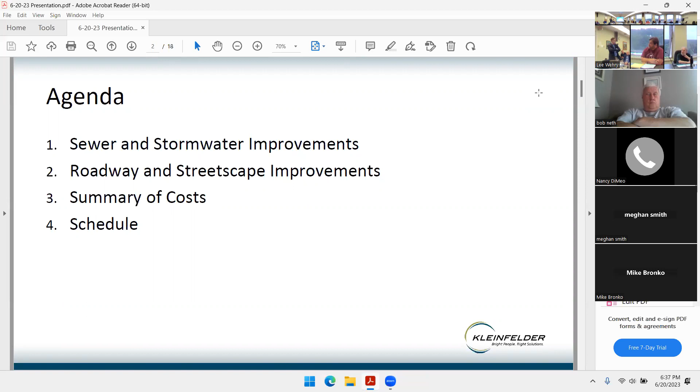So quickly, we'll talk a little bit about the stormwater improvements. Again, the mayor did a great job kind of introing why we're here. Mike's going to dig into some of the detail, the roadway and streetscape improvements. So we've got some nice renderings so you can see what you're going to get. And then as a summary, we'll walk through the costs and what the schedule is going to look like, hopefully moving forward.

So, as the mayor indicated, we collectively came into this with the understanding that there were significant issues in the downtown area, in this west side of Naugatuck, really drainage issues in particular. And the mayor and Jim and Jeremy really explained the dynamic of what was happening down here and what they saw, when they saw it, so we took that back and studied the systems, modeled the systems, performed hydraulics, and really found significant issues, right?

So there's three goals here. One is to fix that, essentially address those issues. Two was really we wanted to make sure that the surrounding infrastructure was also supporting the development plans that the borough also has. So is there enough capacity in the system? How's the drainage? Really, the third thing is how is parcel B going to integrate with the downtown area?

So really our approach to the drainage, the stormwater drainage, and ultimately the sanitary here was to address those three components, right? So what we found was Church Street, the drainage system was undersized. It had conditional issues, so like broken pipes, segmented pipes, probably been in the ground for 100 years, parts of the system, at least. Maple Street, it wasn't so much the overall capacity of the pipe, but there were some bottleneck segments there due to repairs over the years.

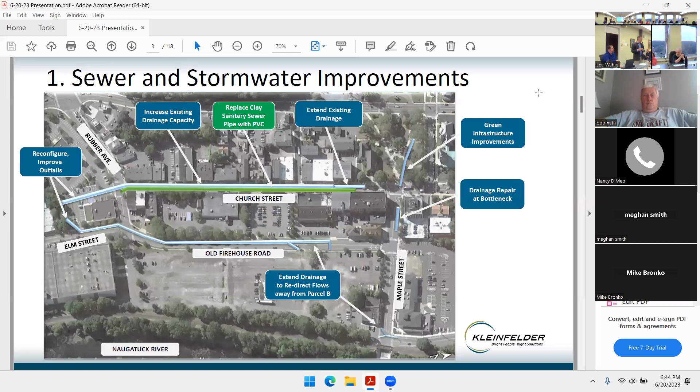All right, so Mike's going to take over for a little while and walk through what the roadway and streetscape improvements are going to look like.

No, he's moving it. Right. Just point.

plantings, street trees, pavement, outdoor furniture, the design of these outdoor spaces all work together to create, I think, a much more festive and inviting atmosphere, a more pedestrian-friendly environment. And all will go to increase activity in the downtown, which is a good thing for merchants and business people.

This is from 30,000 feet, the overall streetscape plan. I'm just going to give you a quick overview on this, then we're going to get into some more details and graphics. This is the plan. It's really an advancement and refinement of the plan that I presented to this board back in the fall. You remember, it was preliminary design. And we've made some great progress here in moving this forward.

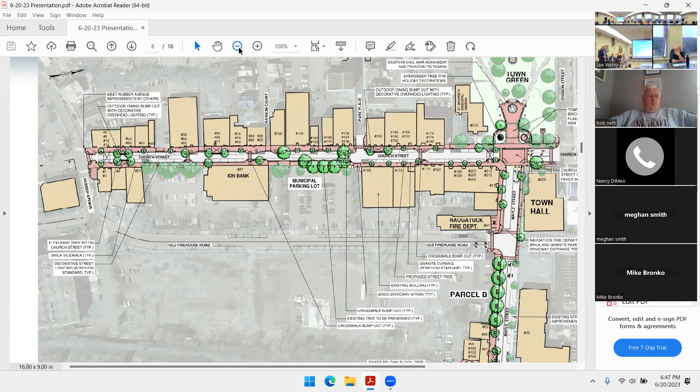The plan takes a really comprehensive, complete streets approach throughout the downtown. It looks at roadway pavement, traffic calming, improving pedestrian circulation, widening sidewalks, narrowing crosswalks. It also looks at linkages from Church Street to the surrounding projects, including what the mayor mentioned, parcel A

and B. The new rail station, it'll be located down here, and some of the connections through the alleyways and proposed walkways to the parking that supports Church Street. Streetscape improvements include brick sidewalks, more appropriate street trees, which I'll talk about in more detail later, the different types of lighting, ornamental and specialty lighting, outdoor dining and gathering areas, opportunities for sculpture and art.

A major part of it is really the transformation of this part of the town green and the intersection right on that. The town green is probably the heart of the downtown area here. And it's one of the most, if not the most significant public space in the town.

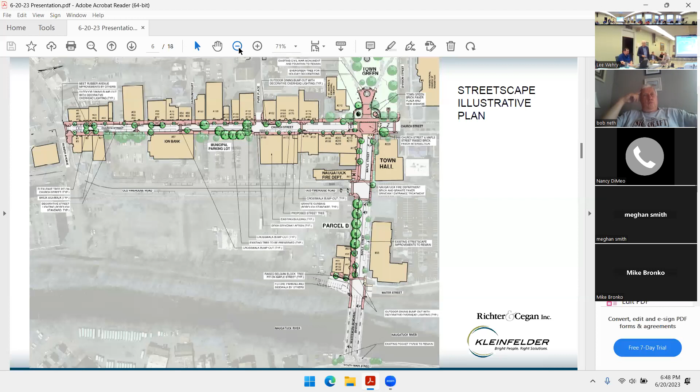This is the proposed improvements in a typical stretch of Church Street, showing the application of the streetscape standards along the street. The one-way traffic heading south is maintained with parallel parking on both sides of the street. Granite curb proposed in the brick pavement, the street trees, and again, I'll talk more about them shortly. Addition of ornamental lighting based on the standard fixture, benches, receptacles, site furniture, all start to work together here.

The sidewalks have been widened on both sides by a few feet in portions of Church Street, not everywhere. Brick pavements in the herringbone pattern, and we've done something a little special here. We've taken a likeness of the paver that's on Hillside Avenue, the historic paver there, a replica of that, and repeated it in the brick pattern up and down the street. And I think this will give the downtown something that's very unique to Naugatuck, special.

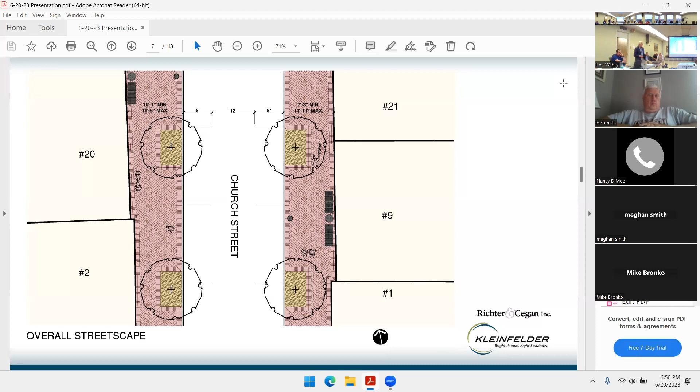This is a section across Church Street where there's an outdoor dining area proposed. This shows a number of the streetscape elements. We'll talk about some of those. And we've incorporated these outdoor dining areas at a few key locations along Church and also along Maple as well, where there are clusters of restaurants that are kind of strategically located.

They would include string or catenary lighting overhead, which gives it that festive look. That'll remain up and down the street from a lighting perspective, but also increases the use at nighttime of the outdoor dining areas. The standard streetscape light will be continued throughout, creating a uniform lighting standard in the downtown. There are a few darker areas right now, and those areas will be covered in the new lighting layout. So we'll be addressing that.

We're removing existing problematic street trees and proposing new street trees in the entire project area. Each street tree will be selected for its situation and where it's located. Right now, there's one type throughout the whole downtown, no matter what the application is. Almost all the street trees in their application are high branched and narrow upright to maintain views and visibility to storefronts and signage.

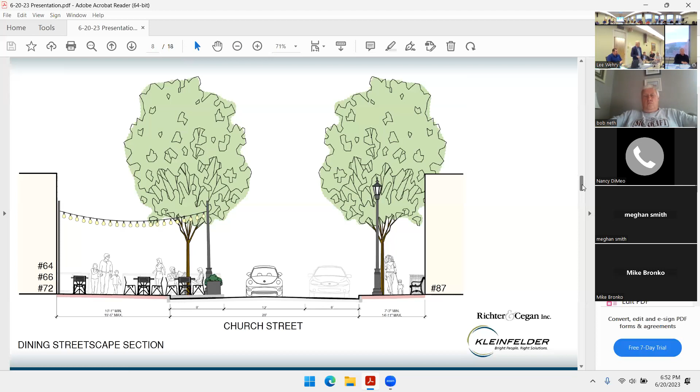This is a typical bump out for the outdoor dining along Church. We've maintained the access along the sidewalk for pedestrians coming through. This shows a table seat layout with the catenary lighting crisscrossing on top and defining the area. Raised planters along the street give some separation for outdoor dining from traffic along the street. Street trees provide canopy and shade for these outdoor dining areas.

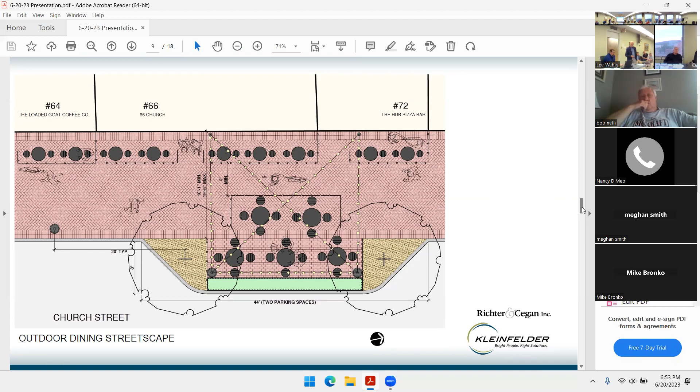We've also taken that lighting effect and strung the catenary lighting across the roadway, Church Street, in two key areas. Between the lighting and the repeating ornamental posts and the columnar trees on either end, we've created a gateway effect with this lighting, and I think it's really going to celebrate and announce the changes in the festive atmosphere that we're trying to create along the street.

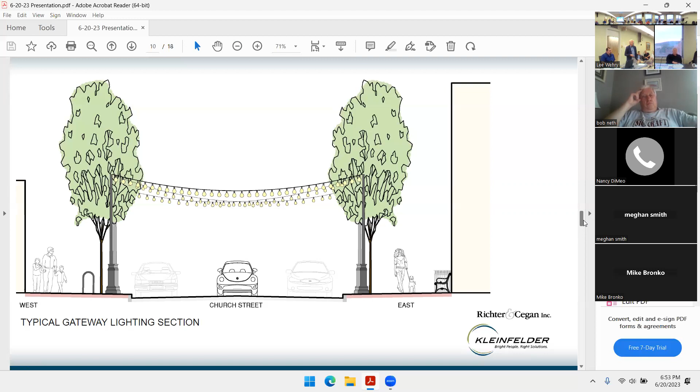As I mentioned, the streetscape is also continued down Maple Street. This is a section on Maple Street right across from the existing parking lot in the Parcel B development. We've worked closely with the Penrose Group and their proposed design so that the two are coordinated and they'll merge seamlessly into one another. We'll continue that coordination as this project progresses.

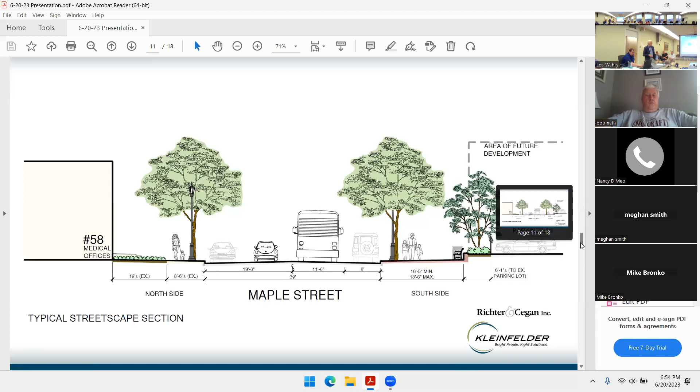A major intersection is the Water Street, Maple Street intersection as you come over the bridge and under the rail overpass. This is kind of the first intersection that you see. It's also where from Water Street you'll access the new rail station and also some of the development of Parcel B, Parcel A farther down the road.

With the grouping of restaurants here, delis, the sports bar, and the coffee shop, there's a great opportunity for outdoor dining that we've set up in a couple spots here with the catenary lighting. And it's also a really important intersection to showcase the streetscape components in the streetscape design as well.

Can I ask a question on this slide? Sure. Where's the parking if somebody wants to go to Nardelli's or to the sports bar? Parking is located on this side of the street. I believe there's parking here. Yeah, we're gonna maintain the parking adjacent to the abutment. The spots in front of the businesses are gonna go away, but they'll be there until the Penrose development comes in.

There'll be parking that's available there, and then when the Penrose development comes in and the station comes in, there's gonna be additional parking right along Water Street, all the way to the station. Rocky, we're gonna make angled parking on the other side of Water Street, going towards the station restaurant. So it'll be, I don't know how many, but way more new spots than the spots that are going away.

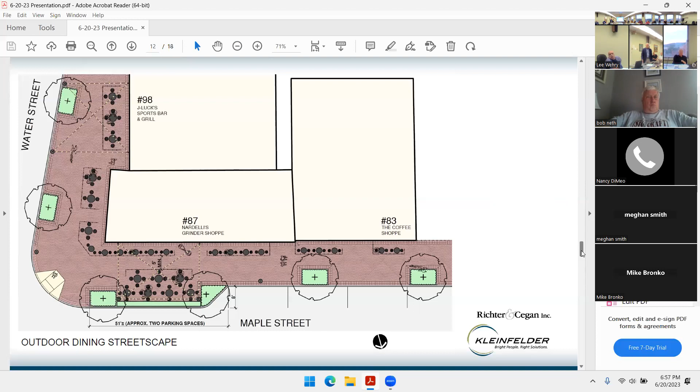It's just, I know that Nardelli's and the coffee shop, in the morning there's a ton of cars there for the coffee shop. And then at dinner time, Nardelli's cars are coming in. Yeah, the coffee shop shouldn't be affected in terms of parallel parking right out front, in front of their business. We preserve all. Yeah, I spoke with the new owner there and kind of gave her an idea, and we did meet with Nardelli. They did express their concern about how that parking is gonna transition. Yeah. Throughout, so we tried to, again, address their overall concerns and kind of try to understand what the long-term solution is gonna be.

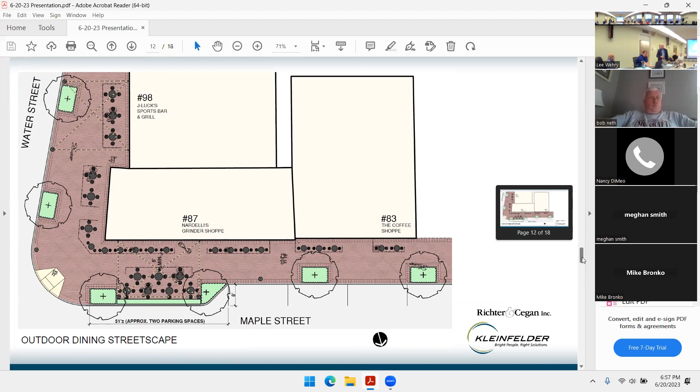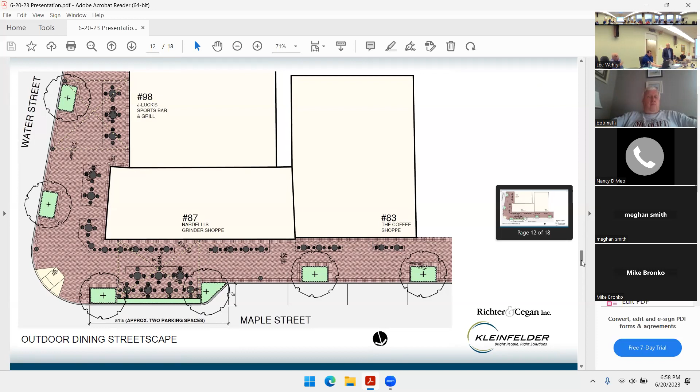Okay, thank you. Maybe this is a spot for angled back-in parking. We did that on a project a little while ago. People would get used to that. It's just so much easier pulling out, and if you have kids and strollers and everything else, it's just so much safer. You're not going around to the back of the car. No, the only reason I mentioned it is I know in the past when it was discussed for like Church Street, the police department has said that they weren't in favor of that kind of parking.

So as part of this project, we're also gonna address the Maple Street Bridge, and essentially do a rehabilitation to the pavement there, the existing pavers that have failed, and they failed right away. So our plan is to come back and remove those pavers. We looked at trying to put pavers back in that would work, that wouldn't fail. And really, because of the substructure of the bridge, and its historic design and the way they restored it, it makes it extremely difficult to have a paver system there that's gonna function correctly, essentially with the drainage.

And so our plan is to come back in with a pavement system. This is a bituminous pavement system with a thermoplastic coating, so very similar to the modern crosswalks that you see. So it's essentially a bituminous surface with a treatment at the surface. It's not gonna be slippery, but we're able to add some color to it to complement the bridge, similar to the original intent and the original design there. So it'll look like pavers, but it'll be a bituminous section there, and that acts like bituminous pavement.

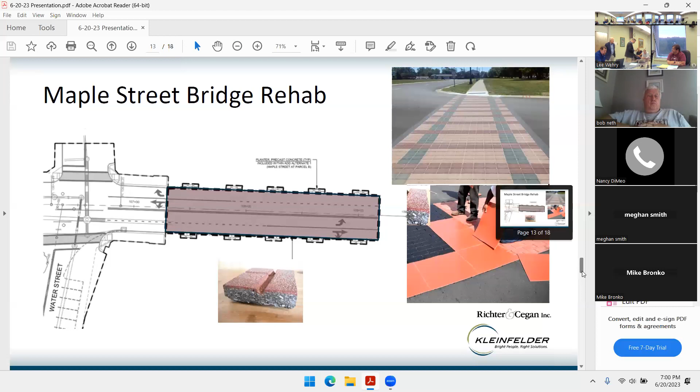I'm gonna end discussion on the streetscape at the town green area. Really, as I mentioned, probably the most significant space in the borough, in the heart of the downtown area. We're proposing some major changes here, and improvements and upgrades. As we move forward, the design respects that axial symmetry that really starts way down at the bridge, extends up Maple Street, right through the green, up through Schoolhouse, and even beyond that. So it respects that symmetry on both sides.

The design also respects the historic lines of the green. Streetscape elements, the pavement, lighting, etc., extend into the green area, highlighting the existing Civil War monument area.

There's new seat walls added that are kind of welcoming spaces at the entrance, and they flank the Civil War monument. You also create a focal point with a proposed holiday tree here on this side, and a raised performance or sculpture platform on the other side as well. So this creates a whole new kind of welcoming entry into the green, yet respects the lines of the green, adds benches and planters within the green itself.

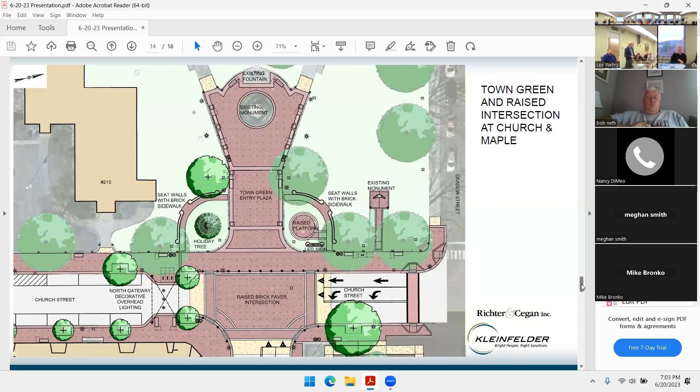One other feature that's in the town green proposed is an electronic message sign. It would be set, sort of a contemporary look set on a very historical base. The same base as these granite seat walls that match the granite that's both in the curbing, bollards, and in the monuments that are in the green itself.

We do have a question about the green in general. One problem we currently have is outlet accessibility for fairs and events. And right now, the electrical on the green is questionable at best. Was that factored into the design here? Yes. We are adding a number of outlets. Excellent.

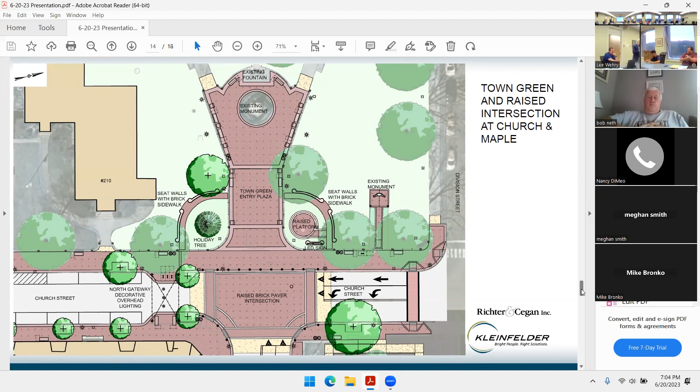Here's that proposed sign on the granite base that mimics the proposed seat walls and the granite that's already historically in the green, flanked by a Naugatuck granite sign as well. Here's the message board. We are looking at different options for what should read on this. We're going to get the board's input on what your preference is. One is just to say our logo, Naugatuck events, which is up here. A second option is a welcome to Naugatuck sign.

By the way, Mike, just don't forget, we're changing our logo. It's a long story, I won't bore you with it tonight. Naugatuck does not mean lone tree by the river, so we're gonna fix it, we're gonna have a new logo. You're gonna get rid of the trees, run that by the conservation? No, I didn't, and I won't. I'll make that clear, we're going with the river.

Has a logo been established? No, we're gonna have it designed. We have a young designer who's working on that. We'll make sure in the plans that we put that in there. A second option is just a welcome to Naugatuck sign, and we kind of repeat what's down by the bridge as we come off the highway. Another one is more what you typically see in town greens, town centers, for Naugatuck when it was incorporated. So these are three options. I'm sure there are an infinite amount of other options. Suzanne here would be happy to get any preference or input.

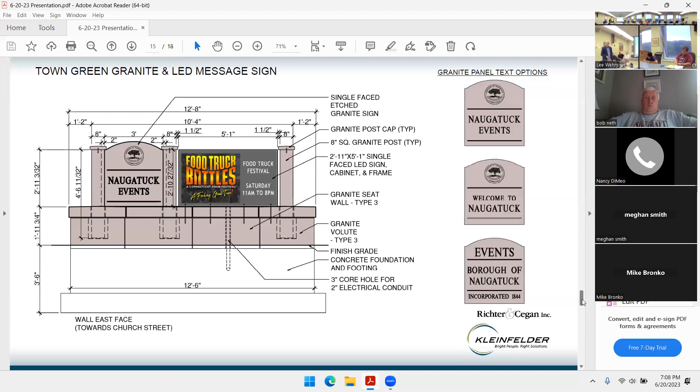Did the scooters come back? That's a private business, if they wanna come back, they can come back. If they don't, they won't.

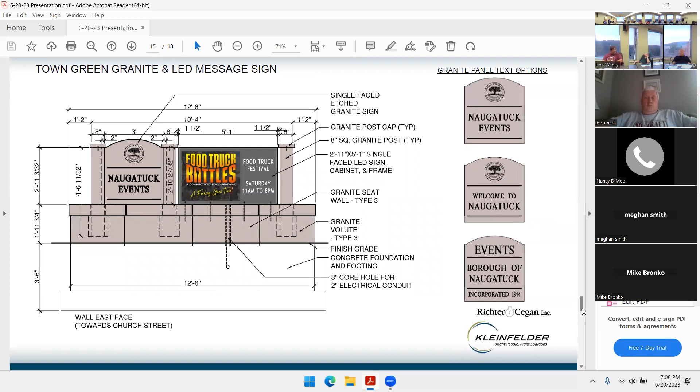All right, let's go to the exciting part now, yeah. So, costs. Mayor, I'll let you jump in here, but you can't see the whole screen, you gotta move it up or something. Is that the whole screen? Yeah, that's the whole screen. Oh, okay. All right. So, oh, okay, here it is.

Essentially, this is what's already been done, the planning and design that we've already completed. Our construction cost estimate is just short of 12 million with the contingency built in there. You'll have some services during construction, inspection, to make sure it gets installed properly and control the costs. So the grand total for the project is 14.8. As the Mayor indicated, the ARPA funds are 9.2, and the plan is to pay the balance with the TIF funds at 5.6 million.

This doesn't include the environmental model, correct? Oh, yeah, we were discussing that as well. So the environmental aspect of the project, we got a grant for 5 something, and it saves us money on this project by making those additional improvements. So all those numbers are included? They are, we built these into this numbers. Right now? Yep.

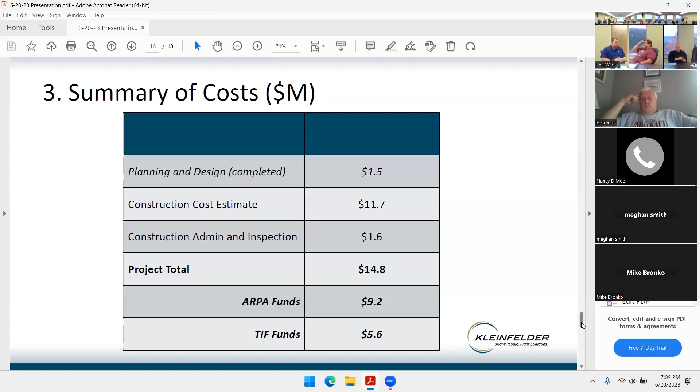So lastly, schedule. As the mayor indicated, we've been working with the utility companies early on. Connecticut Water moved up their replacement. They had a plan, but they moved it up to get it done to accommodate this project. We've been speaking with Eversource and Eversource Gas pretty closely, and they have plans to make upgrades and modify their system. In particular, the gas piping will be all new plastic gas piping; the current piping, I think, was cast iron. So they're gonna put in modern plastic piping, which will be safer long term. So those utility relocations by others are essentially already underway in preparation for this project.

We are at the finish line with the design. We've got plans and specs ready to go out to bid. The bidding time frame will be at least a 6-week time frame. That'll bring us into the middle of August. So give yourself a month to pull a contract together, make an award, and then sign a contract and have the contractor ready to go in early October.

Now, it's likely they will not take on a large amount of work or disturbance, so they'll probably mobilize, deal with some of the things, maybe at the outlet, in this first season, and that kind of extended the schedule here on our construction duration. We're looking at starting in October 2023, and then being substantially complete by the end of fall 2024, assuming they will need to come back in the spring to button up plantings, maybe final paving, button up everything in the spring of 2025.